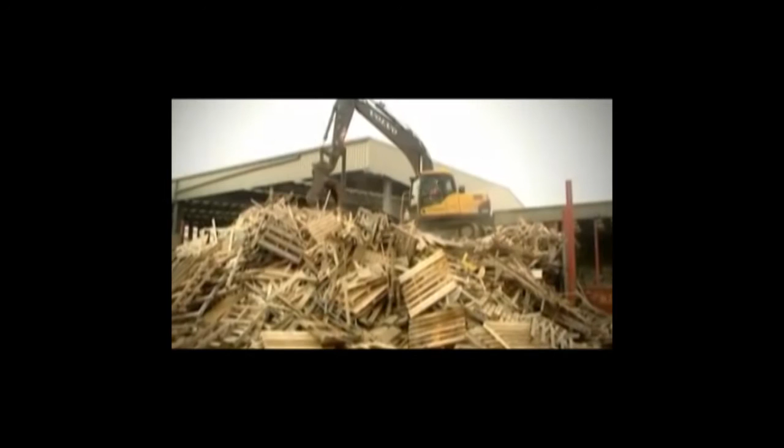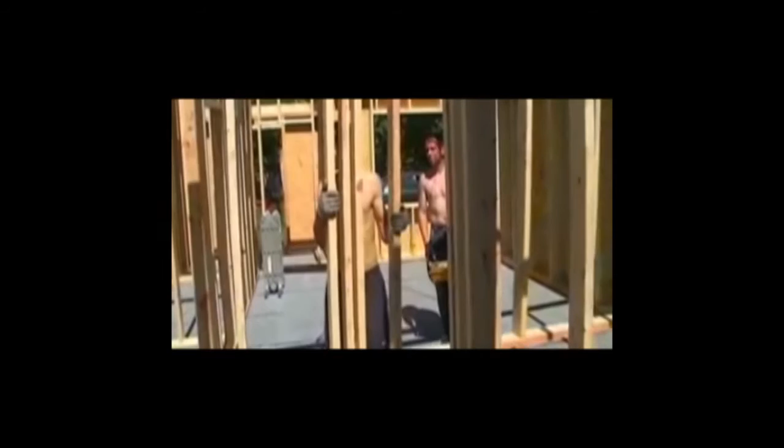In the United States alone, enough usable wood is wasted to build approximately 65,000 single-family homes. The United States culture typically relegates timber to use only in small-scale residential projects. However, new opportunities to explore the application of timber-formed architecture arise from the increasingly complex needs of our society.

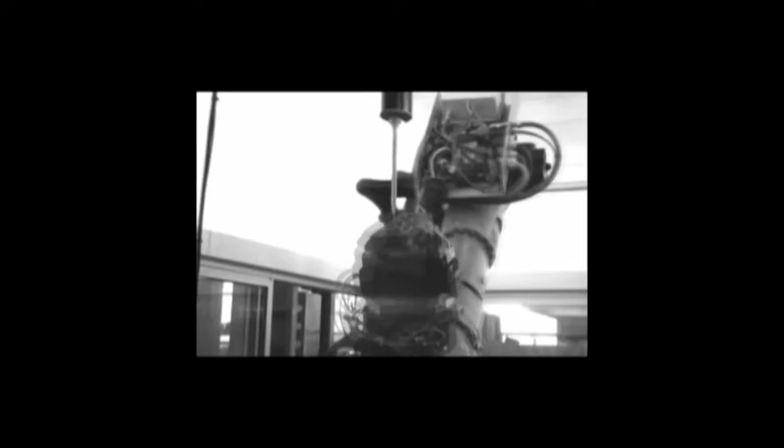Usable timber is often discarded because it does not meet dimensional needs for typical construction methodologies. Instead of following the current paradigm of standardized building, software and computation can allow the exploration of complex architectural systems using what is typically considered scrap material. Genetic algorithms provide the basic framework in which the system in this thesis is developed.

For the system to be successful, computational processes must be used to account for the varying dimensions of scrap lumber. The software must first understand the form that is to be achieved, and then calculate a placement solution. Specifically, the system must interpret incoming data from the material and make a decision: either the member is to be placed or set aside for later use. The algorithm operates on a loop until the desired form is achieved.

The most basic purpose of these prototypes was to find differentiating space by organizing pieces of wood into a performative architectural element. Finding the proper pattern is the most important factor in developing complex space. A recurring theme of additive fabrication began to emerge through these studies.

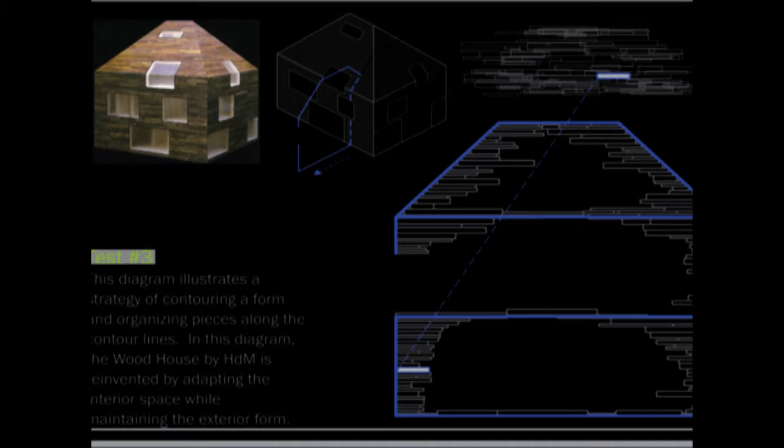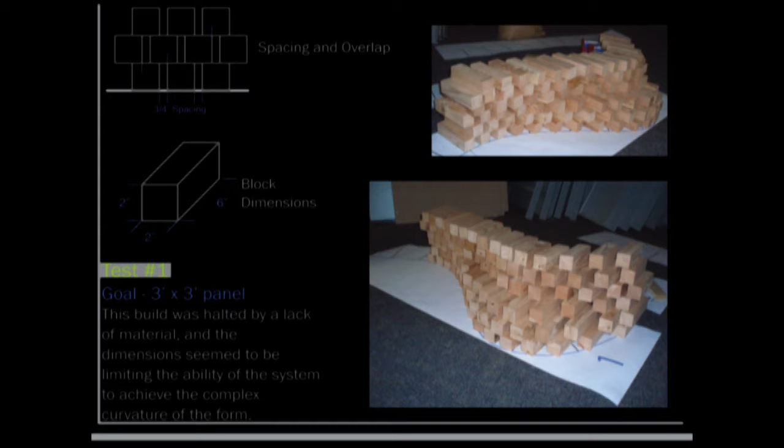My initial prototypic attempts involved block stacking techniques. I set parameters of block placement to achieve a 3-foot by 3-foot panel. It quickly became evident that without a connection, these prototypes cannot be pushed towards complex forms.

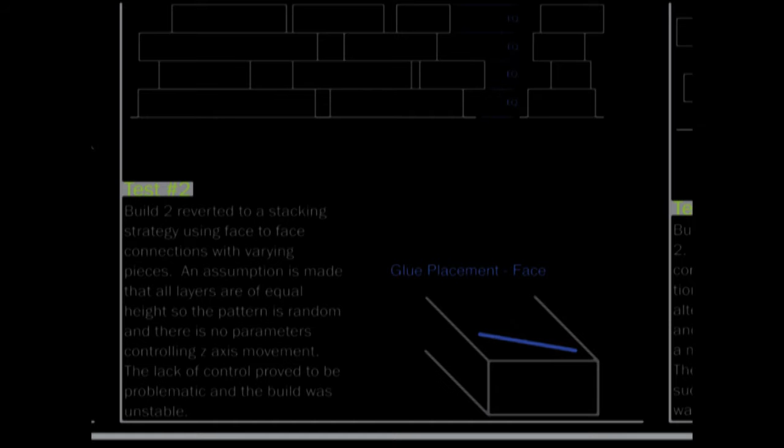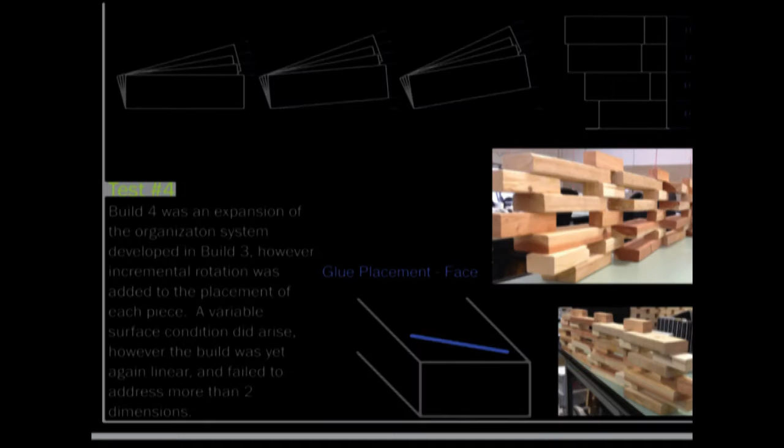While initially exploring connectivity, I tested wood glue and its tolerances to achieve various organization patterns. These initial tests revealed significant limitations of glue for achieving various stacking patterns. For example, the dry time for glue necessitates holding the forms in place for long periods of time. Additionally, it was difficult to create heterogeneous spaces due to the lack of predefined form. Without any formal goals, the prototypes became aimless and did not warrant further exploration.

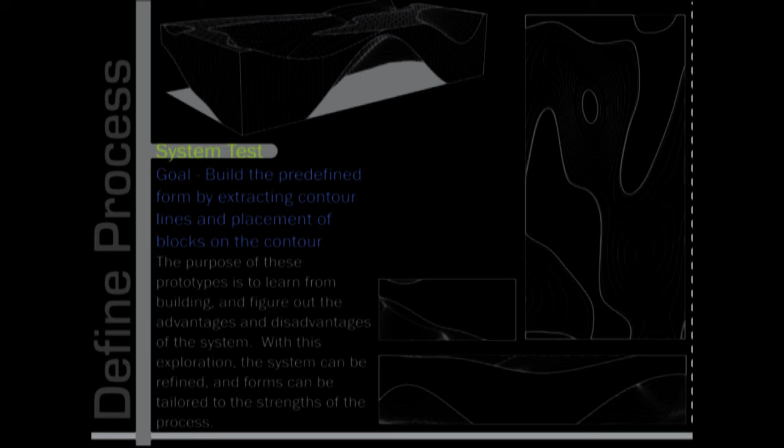When approaching the prototype sets, it is important to remember the process is recursive. Thinking back to the first prototypes, the goal was to accomplish a predefined form, yet the form was not understood before being attempted. If a form is contoured, the shapes of each contour can be achieved, thus creating a complex structure.

A complex system of organization and connectivity is demonstrated through the chair prototype, as a rotational alignment changes from layer to layer. Each layer connects to the previous by sufficient surface area overlap. Multiple fasteners are then positioned at each intersection between the layers to prevent rotation at the connection points.

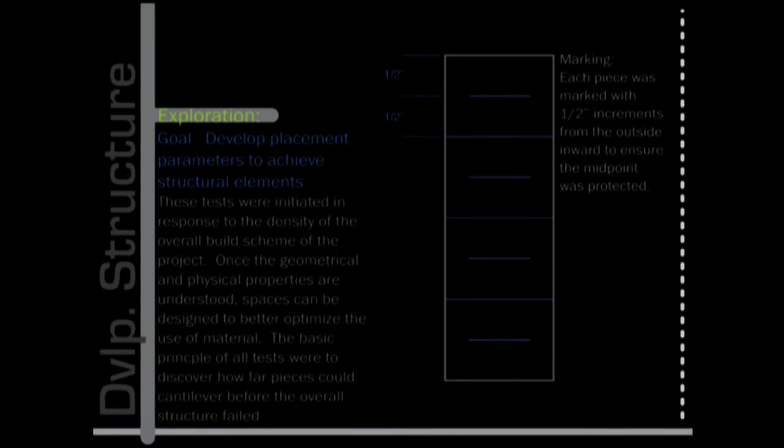To push the potential of complexity within the system, unlocking structural geometries can provide a basis to generate forms. The idea behind pursuing columns was to help mitigate the density of material being used. Instead of trying to achieve a mass, a network of columns can create spatial conditions.

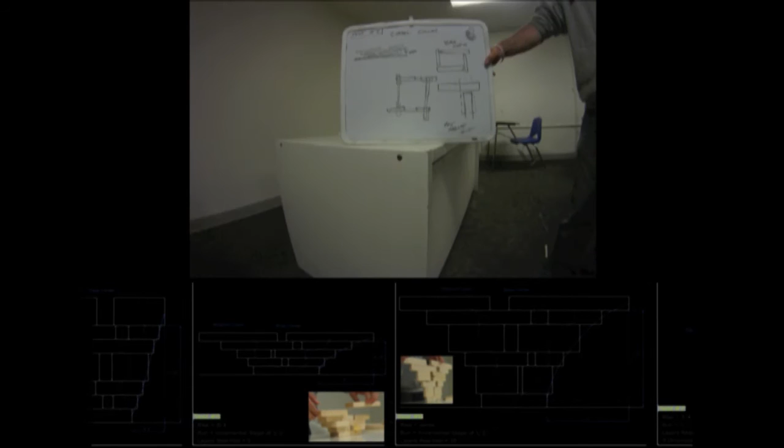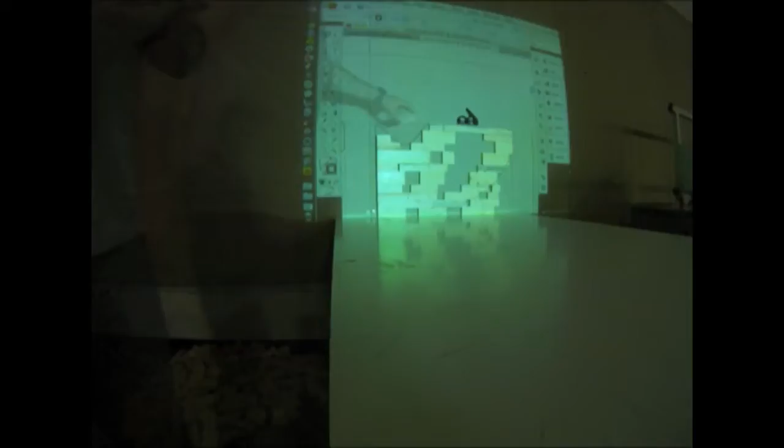Finding a suitable construction technique for the later prototypes proved to be challenging. At a very small scale, printing contour lines on paper was successful. However, once scaled up, that strategy becomes obsolete. The primary method of construction for the builds used a projection system. The images of contour lines taken from forms were projected onto a wall, and wood blocks were then placed to fit those lines. Although it proved to be a sufficient solution at the time, it was not without issues.

As the build moved away from the wall, the accuracy of the contour lines became skewed, altering the shape of the structure. In addition, using the projector does not take into account the variation in wood size when determining placement, which is still decided by the builder.

Currently, with the help of an engineer, a laser pointing system is in development. The software will take input lengths of the wood pieces, calculate, and point the placement of the member. Eventually, multiple lasers can be programmed. With this system, accuracy is greatly improved, and the system will become deployable in real-world scenarios.

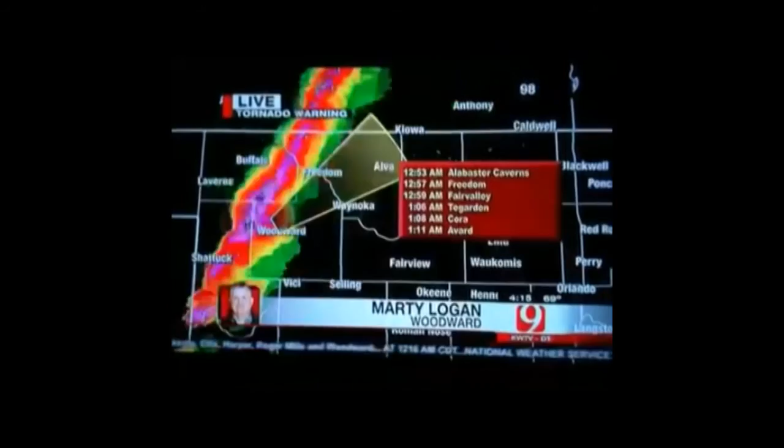National Weather Service has issued a tornado warning. Woodward has been hit by a serious tornado. How are the houses and the buildings? Destroyed.

FEMA and the Army Corps of Engineers have very specific guidelines for emergency disaster response. Unfortunately, the transitional phases after a disaster are often overlooked. FEMA does sometimes provide trailers, but they are not guaranteed to all who need them. Furthermore, there is worry that the trailers provided by FEMA are unsafe owing to the dangerous levels of formaldehyde used in the production process.

The software and systems that have been developed can be used to create transitional housing for disaster victims. With the ability to collect building resources on site, construction can begin almost immediately following a disaster event.

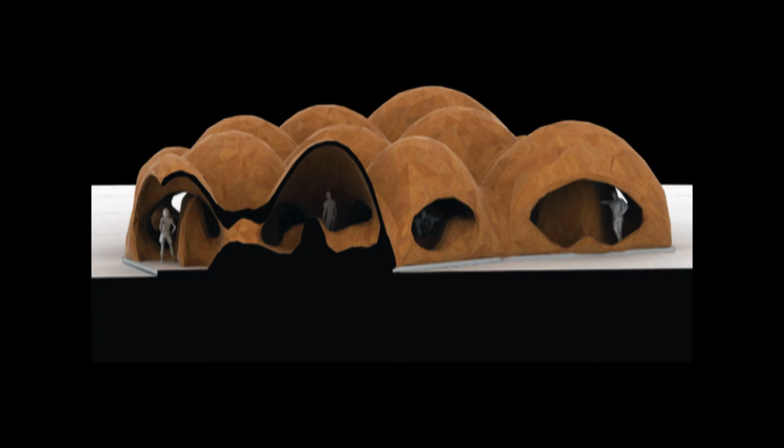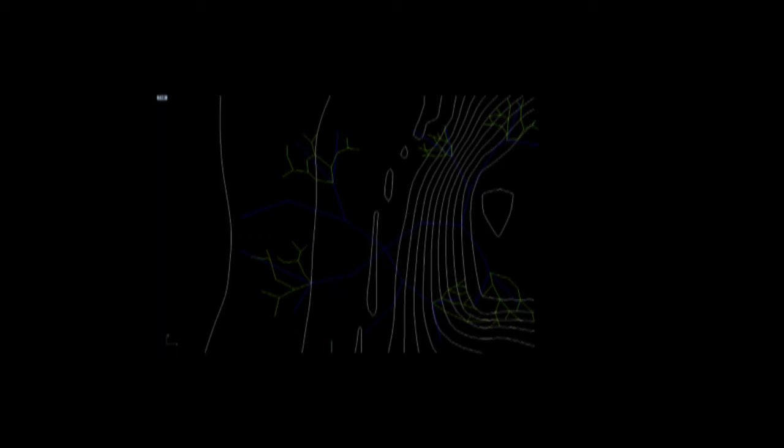An L system is a parallel rewriting system, or a variant of formal grammar traditionally used to model the growth processes of plant development. Architecturally, the branching is an organizational tool that allows for differentiating explorations of space. Branching occurs at several scales, initially finding a location, then setting up primary structure, and determining the interior variations.

The branching system sets up the anchor points to create a network of catenary vaults. A combination of 3 and 4 anchor point vaults are used to achieve the best coverage of points. Using parametric modeling, the physical characteristics of the arches are adjusted to meet the needs of local conditions. The catenaries create a network of columns, which was the goal when performing the corbel column prototypes.

On the interior of the structure, catenaries are used to create undulations in the ground plane. The variation in that plane sets up space for programmatic functions: sleeping, bathing, eating, and whatever the occupants require.